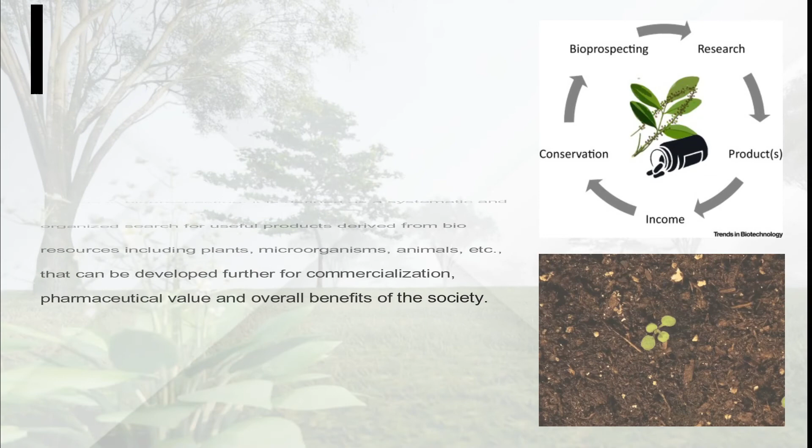The proposed Research and Development Institute will be located in Tanay, Rizal. It will focus on the exploration of natural resources that could be developed into commercially valuable products. The proposal aims to provide responsible approaches and methods in accumulating or yielding of our natural resources. These proper procedures will help us collect data needed for research, develop products and innovations that generate income to boost the economy, all done while conserving our very own rich biodiversity in the country.

Reason for research. The integration of medicinal plants as a crop in agroforestry is a relatively new approach that is beneficial to society. This can help boost the Philippine herbal industry by providing adequate supply of raw materials and new discoveries of medicinal plants to create new and valuable resources, or herbal medicines, and drugs from our very own natural resources, for support in local as well as global needs.

Design concept. Terrain-oriented. Fitting the design to the existing terrain allows for the planning, design, and placement of buildings, roads, streets, utilities, and other infrastructure in a manner that complements the existing topography and minimizes the amount of clearing and grading of the project site. Preserve existing vegetation to minimize erosion potential and generation of sediment. Build on flatter areas to reduce soil cut and fill volumes and the cost of grading operations, then more undisturbed natural area on the site is preserved.

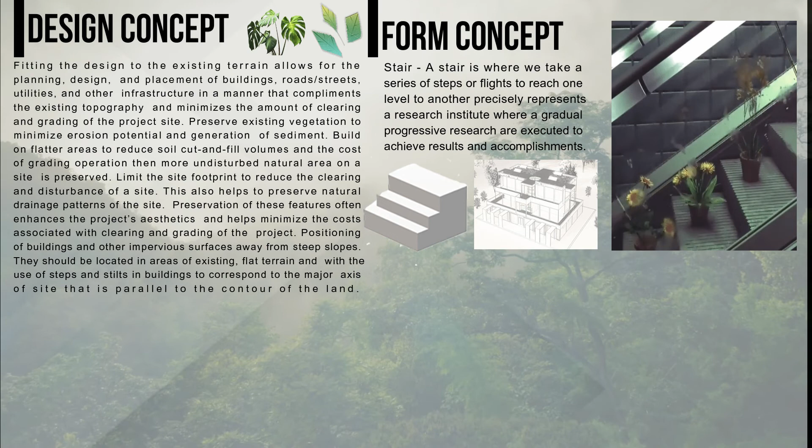Form concept: a stair. A stair is where we take a series of steps or flights to reach one level to another. It precisely represents a research institute where gradual progressive research is executed to achieve results and accomplishments.

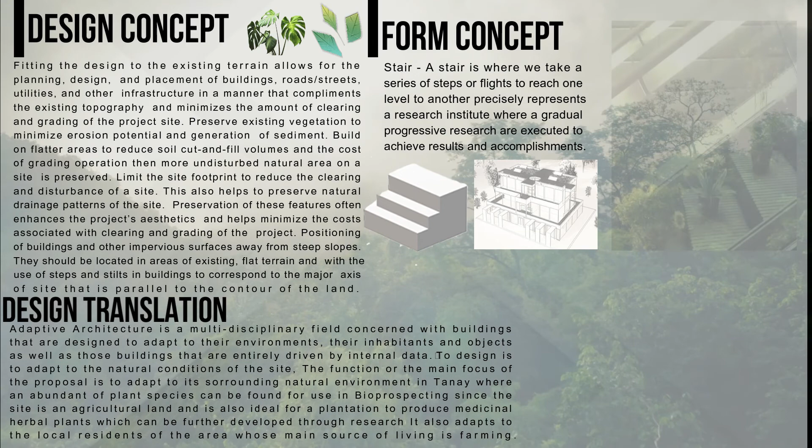Design translation. Adaptive architecture is a multidisciplinary field concerned with buildings that are designed to adapt to their environments, their inhabitants, and objects as well as those buildings that are entirely driven by internal data. To design is to adapt to the natural conditions of the site. The function or the main focus of the proposal is to adapt to its surrounding natural environment in Tanay where an abundance of plant species can be found for use in bioprospecting.

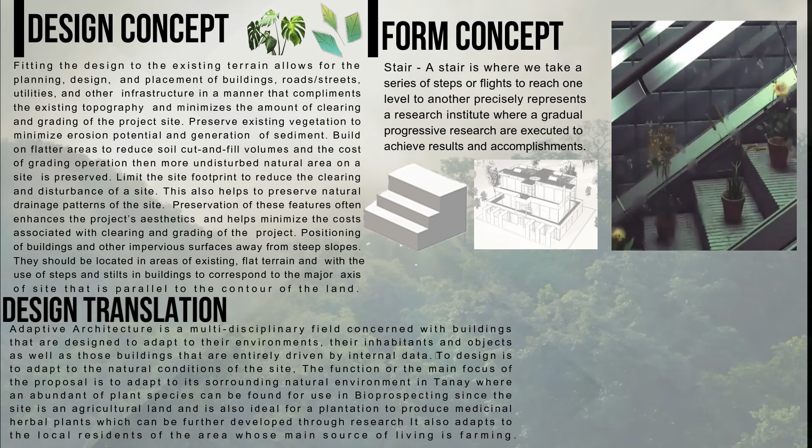Since the site is an agricultural land, it is also ideal for a plantation to produce medicinal herbal plants which can be further developed through research. It also adapts to local residents of the area whose main source of living is farming.

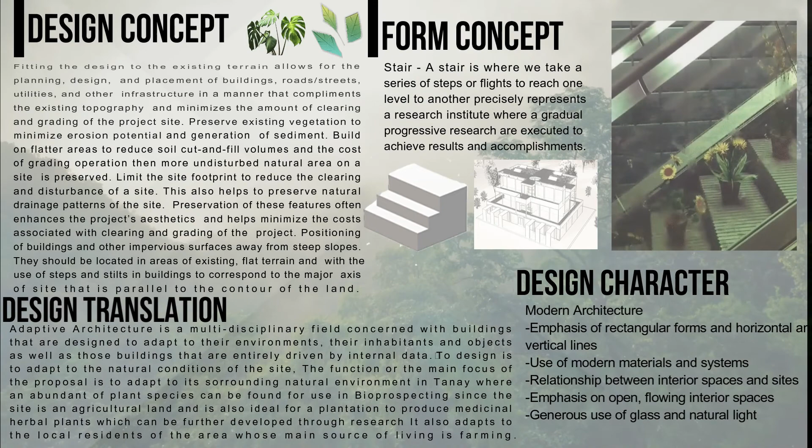Design character. Modern architecture. Emphasis of rectangular forms and horizontal and vertical lines. Use of modern materials and systems. Relationship between interior spaces and site. Emphasis on open flowing interior spaces. Generous use of glass and natural light.

Design philosophy. Form follows function by Louis Henry Sullivan. Functional design, asymmetrical compositions with the use of geometric forms, often with flat roofs and emphasis on horizontal lines. Design considerations include flexibility, expansion, circulation, aesthetic, orientation, privacy, modernization, and accessibility.

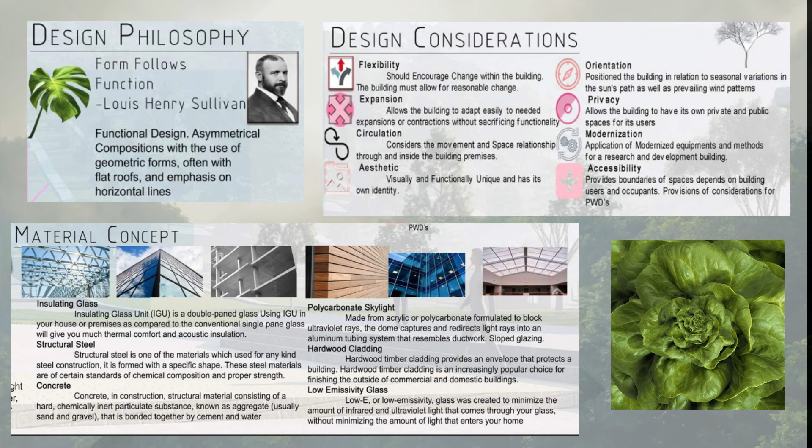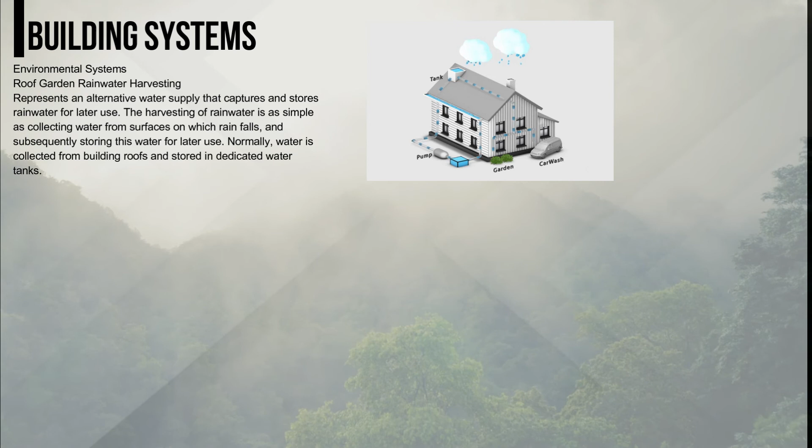Materials used in the development include insulating glass, structural steel, concrete, polycarbonate skylight, hardwood cladding, and low emissivity glass. Environmental systems. Roof garden rainwater harvesting represents an alternative water supply that captures and stores rainwater for later use. The harvesting of rainwater is as simple as collecting water from surfaces on which rain falls, and subsequently storing this water for later use. Normally, water is collected from building roofs and stored in dedicated water tanks.

Natural lighting. Natural lighting, also known as daylighting, is a technique that efficiently brings natural light into your home using exterior glazing, thereby reducing artificial lighting requirements and saving energy. Natural lighting has been proven to increase health and comfort levels for building occupants.

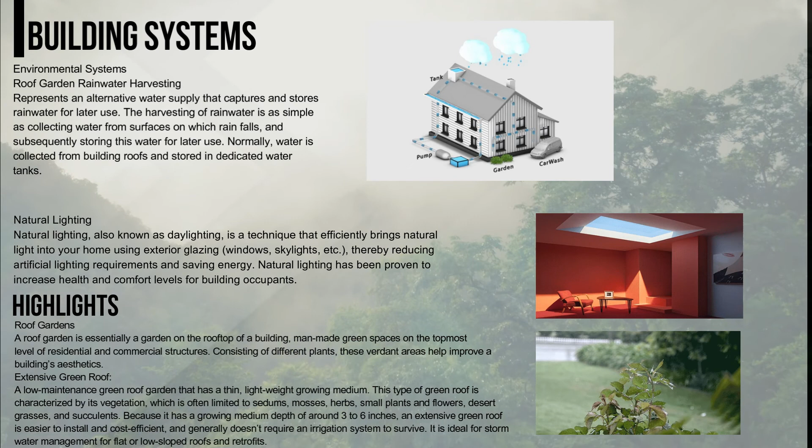Highlights: Roof gardens. A roof garden is essentially a garden on the rooftop of a building. Man-made green spaces on the topmost level of residential and commercial structures. Consisting of different plants, these verdant areas help improve a building's aesthetics. Extensive green roof. A low-maintenance green roof garden that has a thin, light-weight growing medium. This type of green roof is characterized by its vegetation, which is often limited to sedums, mosses, herbs, small plants and flowers, desert grasses, and succulents.

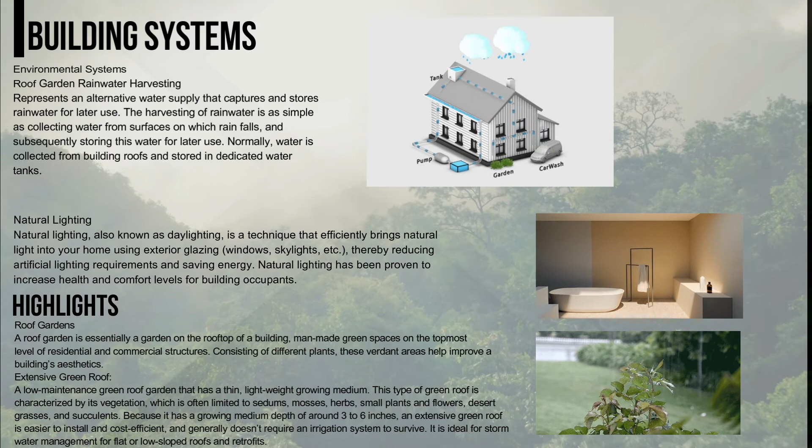Because it has a growing medium depth of around 3 to 6 inches, an extensive green roof is easier to install and cost efficient, and generally doesn't require an irrigation system to survive. It is ideal for stormwater management for flat or low slope roofs and retrofits.

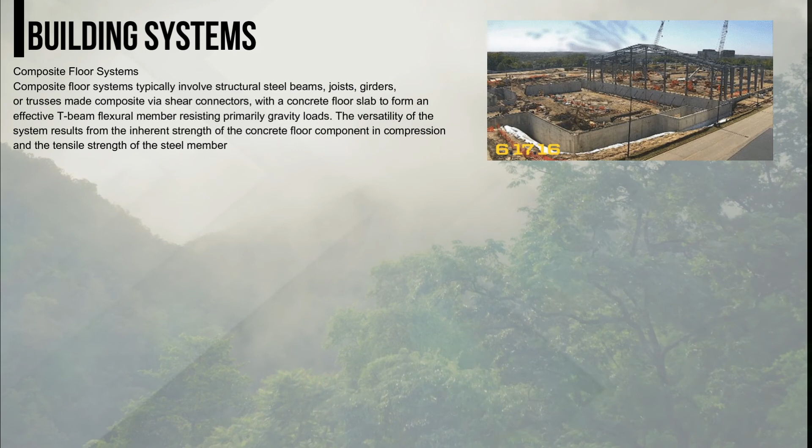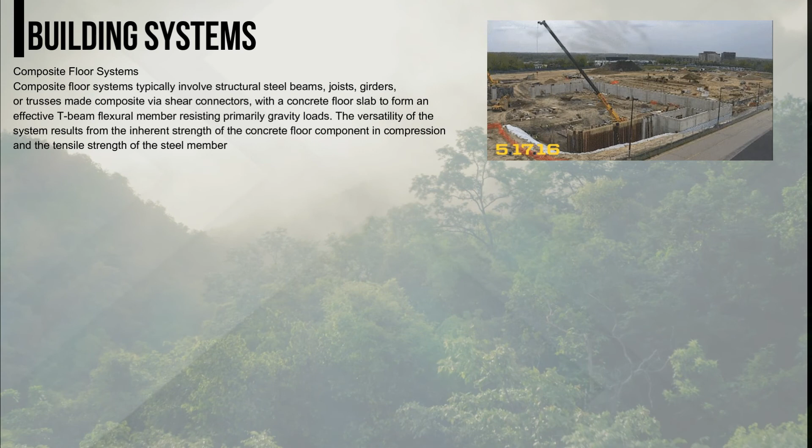Composite floor systems. Composite floor systems typically involve structural steel beams, joists, girders, or trusses made composite via shear connectors, with a concrete floor slab to form an effective T-beam flexural member resisting primarily gravity loads. The versatility of the system results from the inherent strength of the concrete floor component in compression and the tensile strength of the steel member.

Mechanical systems. The location of main vertical supply or exhaust shafts as well as horizontal ductwork is very crucial in designing a flexible lab.

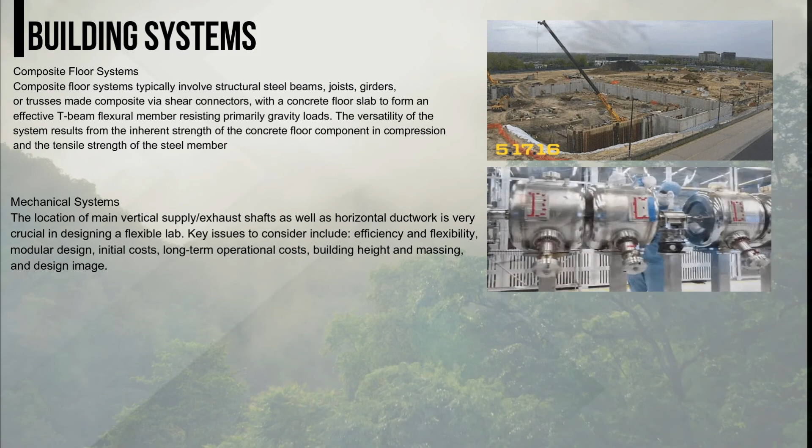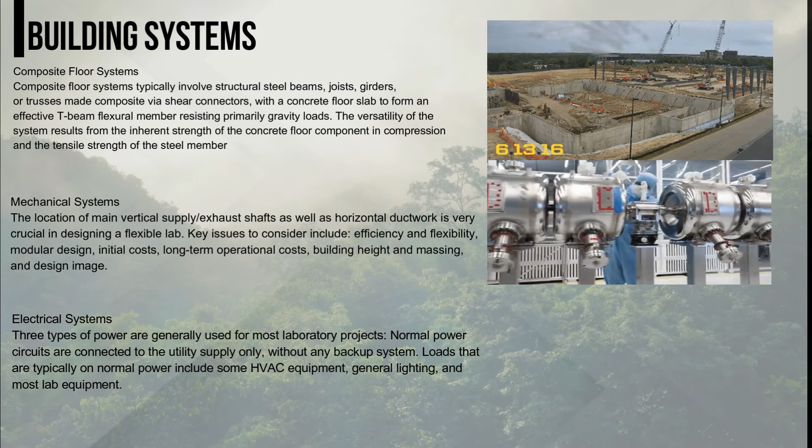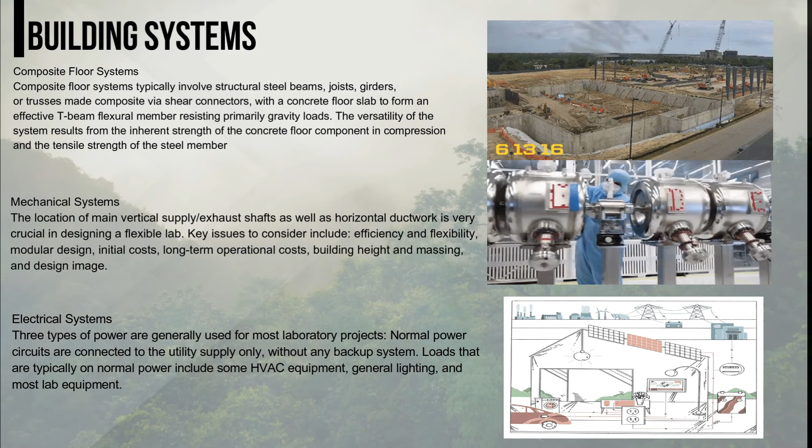Key issues to consider include efficiency and flexibility, modular design, initial cost, long-term operational cost, building height and massing, and design image. Electrical systems. Three types of power are generally used for most laboratory projects. Normal power circuits are connected to the utility supply only, without any backup system. Loads that are typically on normal power include some HVAC equipment, general lighting, and most lab equipment.

The site selected is in the highlands of Tanay, Rizal, which features solitary land for conducting research away from the disturbances of the city. It is also a wide and broad land which can be used for experimenting in applied research in open spaces, plantation for different plant species, and for the exhibition of the Philippines' very own natural resources, since the site has ecologically rich surroundings.

Tanay is a municipality in the landlocked province of Rizal. Tanay is one of the 13 towns. It is becoming an extension of Manila's urbanization along with the city of Antipolo and the towns of Cainta, Angono, Taytay, and Binangonan. Sampaloc is a barangay in the municipality of Tanay. Its population, as determined by the 2015 census, was 30,341.

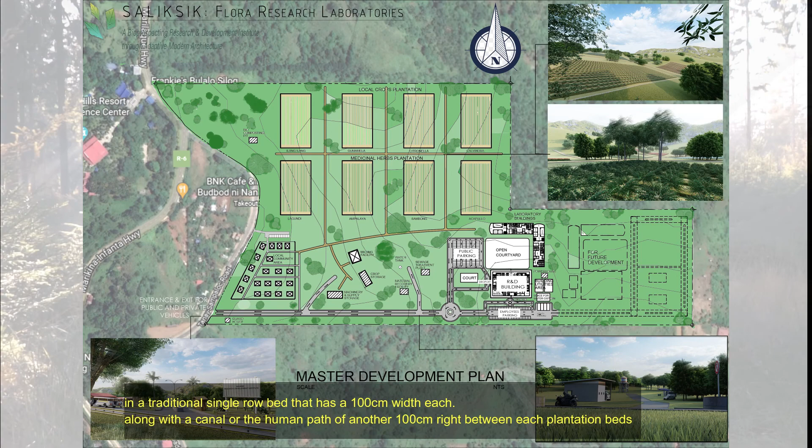The northern part of the site is where the herbal crop plantations are located, as well as the local crops that can already be found in the site, planted with a spacing of 15 centimeters to 100 centimeters per crop, in a traditional single row bed that is 100 centimeters in width each, along with the canal or the human path of another 100 centimeters between each plantation bed.

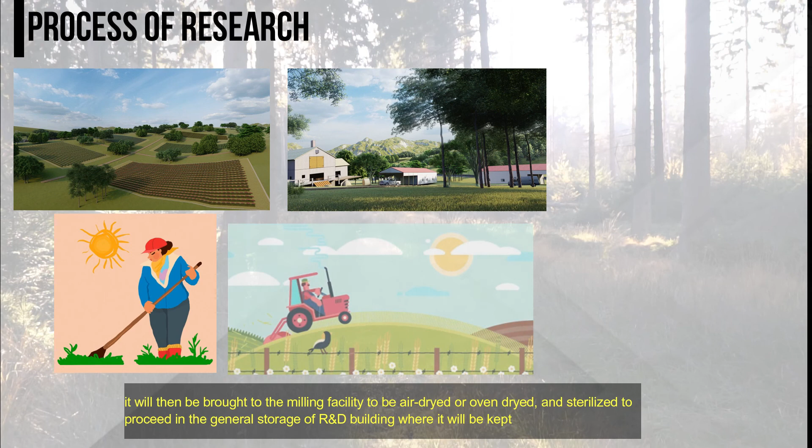Process of research. It starts with the nursery operation, from plantation preparation and management and all throughout the growth process of the crops until harvesting. Once it is ready for harvest, it will be sent to the crop storage to be cleaned and washed. It will then be brought to the milling facility to be air dried or oven dried, and sterilized to proceed to the general storage of the research and development building where it will be kept.

Next is the preparation center of the labs, to be sorted out so it can proceed to the testing and research laboratories for tests and trials to begin bioprospecting. Aside from valuable products that the scientists can discover through bioprospecting, excess resources can also be sold to private companies or manufacturers to generate additional income.

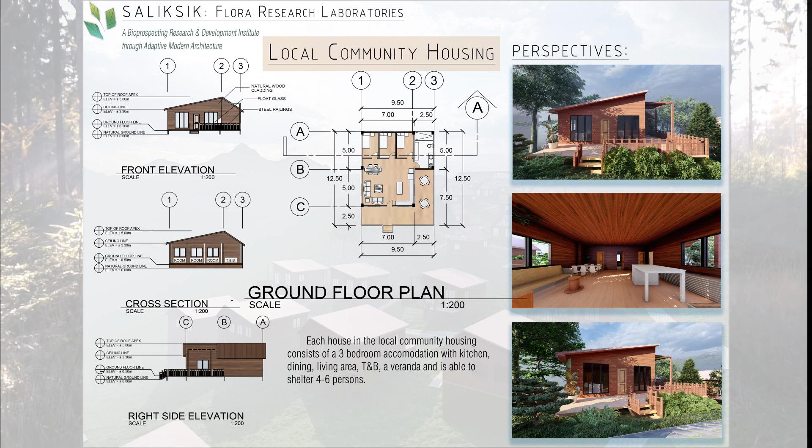Local community housing. Each house in the local community area consists of a three-bedroom accommodation with kitchen, dining, living area, toilet and bath, and a veranda, and is able to shelter 4 to 6 persons. The research laboratories layout uses a horizontal space type of planning, as it is essential in most labs to prioritize the corridors on every laboratory space, whether support or auxiliary.

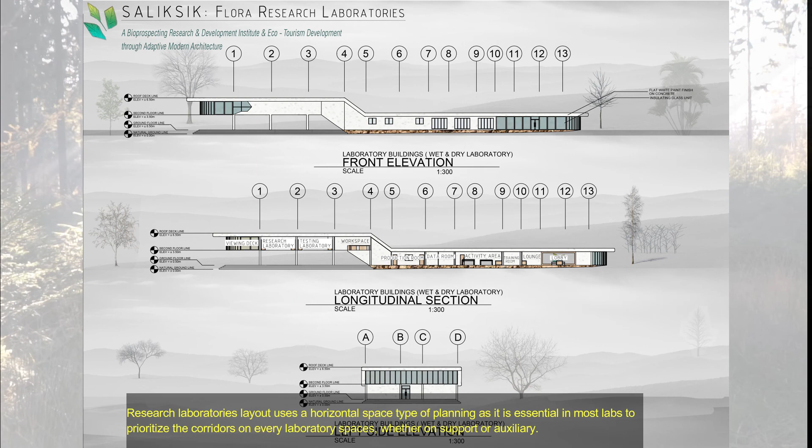Two types of labs are the wet and dry laboratory. The wet laboratory is defined as laboratories where chemicals, drugs, or other material or biological matter are tested and analyzed, requiring water, direct ventilation, and specialized pipe utilities. A dry laboratory space is specific to work with dry stored materials, electronics, and/or large instruments with few piped services. The laboratories defined by this space type are analytical laboratories that may require accurate temperature and humidity control, dust control, and clean power.

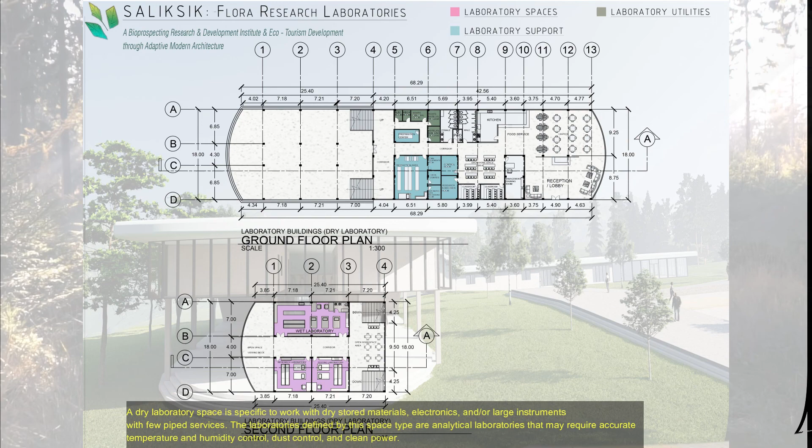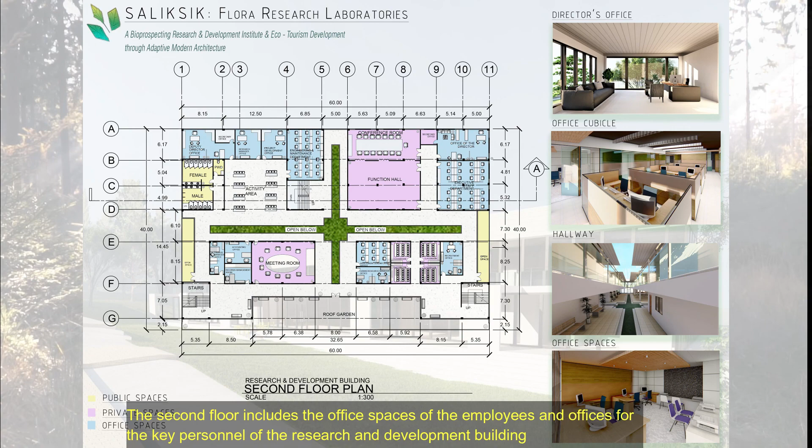The research and development building consists of two stories and a roof deck with a skylight that brings natural ventilation to the interior of the building. The ground floor consists mostly of public spaces, employees' quarters, and common spaces for the visitors of the development, like the showroom and library. The second floor includes the office spaces for the employees and offices for the key personnel of the research and development building. Lastly, the roof deck of the building, where visitors can enjoy the magnificent view of the serene nature of Tanay, Rizal, along with the development.